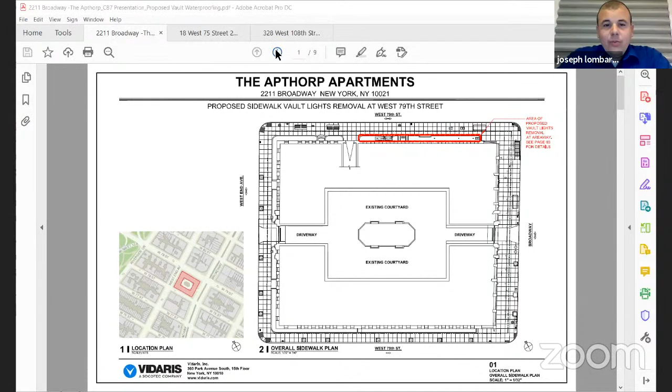And if you go to the next slide, we have some... Can I interrupt for a second? What is an EPDM? EPDM is a single ply rubberized roofing membrane that was popular 20 years ago or so, even more. But now with new technologies and roofing systems, they've gone to a modified bitumen type of membrane, which is a petroleum-based membrane with granules that protect it from UV degradation.

So it's a better water system for the area. And in conjunction with the modified bitumen membrane, we use liquid resin flashings, which is a liquid applied waterproofing at all terminations, seams, and joints. It's just a more robust waterproofing system that's going to protect the machinery and the materials down in the boiler room below.

All right, and I assume whatever happened way back whenever happened without Landmarks involvement. I can only assume because I've been working closely with Landmarks, and we've done a lot of research, and there's no photo documentation or anything that shows a time when this areaway was closed over, because on the rest of the building, all of the areaway is accessible and you could see into the lower level.

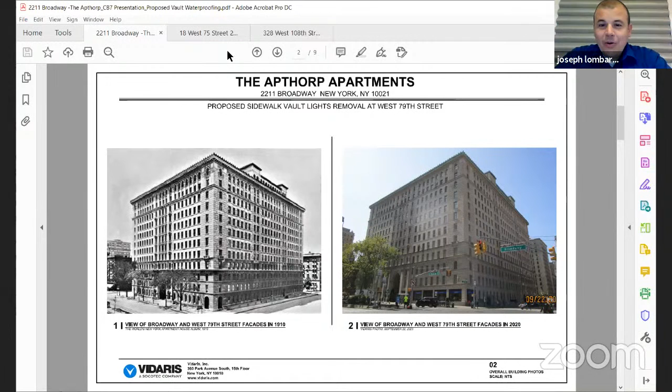So if you go to the next slide, we should have some photos of the conditions I'm talking about. So here we are, I just wanted to give you guys a reference. The first photo, you're looking on the northeast corner towards the building, so you're looking southwest towards the building, and you'll see that granite wall that I was talking about. Thank you, that's about 4 feet high.

I myself am not the tallest person around, so for me to actually see into that, I have to stand directly adjacent to it and look over to see what's going on in there. And if you look at the photo on the right, you'll see what we had to do to temporarily stop the water from coming in. You can see the black below the clear polyethylene sheet, and we've tried termination bars and whatever we could to stop the water from coming in. So that's where we currently stand with this areaway.

I have a couple of questions. In photo number 1, I'm not the tallest person in the world either, but I did glance over. Before you put that structure there over the wall, there were people living in that area. And that's why I thought that structure was put there.

No, that particular structure you're seeing in this photo was - there's a vent below that from the boiler room space. So that perforated screen around that is to allow the airflow, not to house anyone. That would be a deterrent from somebody sleeping there. That's what I meant. Correct. So, also, in photo number 2, you have a bench.

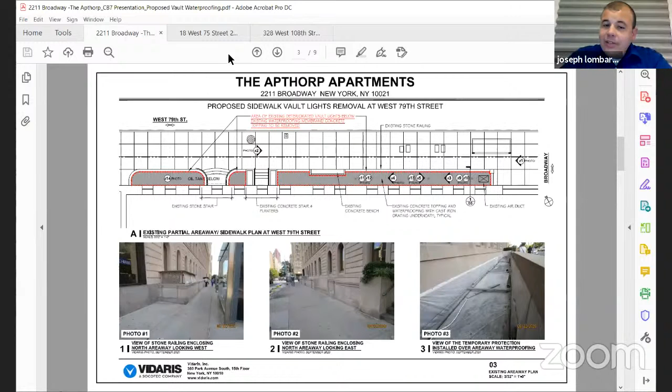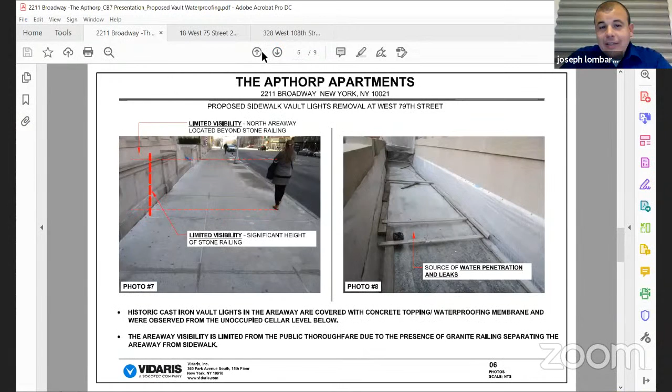If you could go to the next slide, I have a section that might help—I'd like to see the vault lights. One more photo—actually, photo number 6, if you go back. Two slides, please. There you go. Photo number 6 in the bottom right corner, that's from the boiler room looking up, and you'll see.

Do you have a photo of the actual vault lights? Yes, so this—they are. Oh, there they are, okay. This grid, you see from the bottom up. Do you have any photos of them at the sidewalk level? No, they're all covered and encapsulated by this black rubber membrane, which is in the picture adjacent to the left.

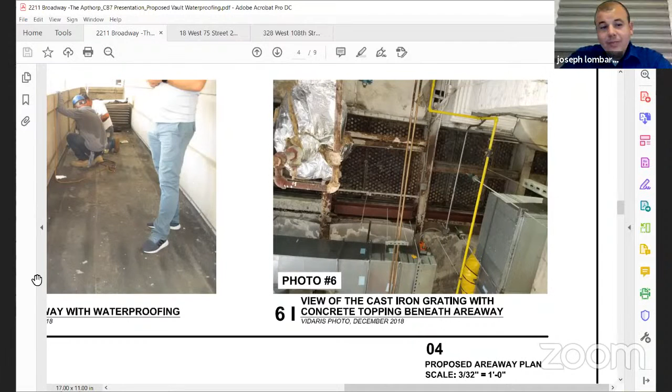And are the vault lights generally intact? No, they're not. What I'm actually showing is one of the better areas. In most areas, they've either completely rusted out—because they're cast iron—and fallen out, or they're missing all the glass and just not in very good shape, structurally or aesthetically.

Okay, thanks. Thank you. So if you could please zoom out.

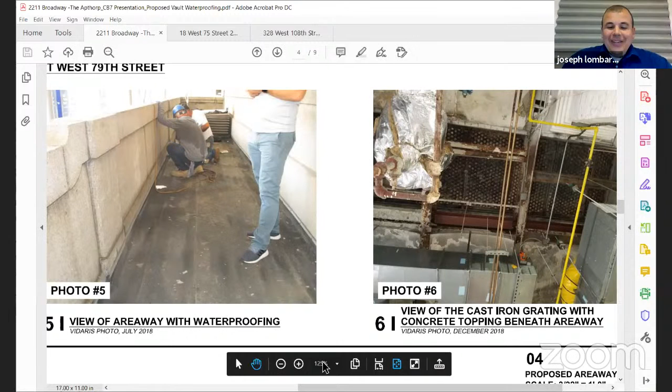In this picture on the left, you'll see the condition of the membrane prior to the clear plastic sheet we just put down temporarily to stop the water from coming in. It's just a black membrane going around the areaway. This is actually clean—we cleaned it out very well. It was becoming a garbage bin; people were just tossing their trash in there. Unfortunately, sometimes people were found sleeping in there.

So what we're hoping to do is put back a clean membrane, just to clean up the area and make it look a little better than it was. The management company running the building now really cares about it as much as I do, and they're maintaining it very well. I don't foresee that happening in the future.

I hope not. How does the drainage work from the areaways? Is there a drain in the areaway? There's one drain—it's not shown in these photos, unfortunately, but there is one drain in the areaway.

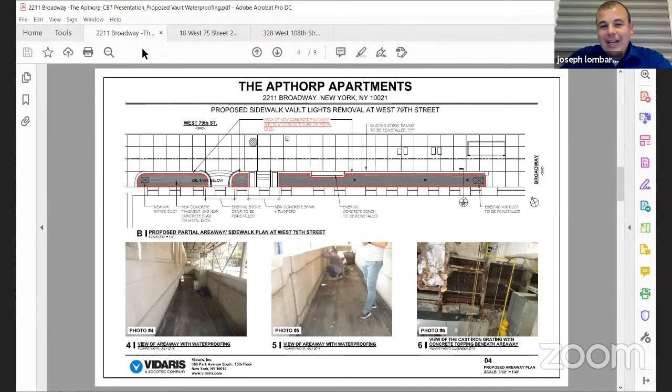Yeah, I can't, honey. Sorry. No worries, no worries.

So that's pretty much it. We've definitely taken drainage into mind with this proposal.

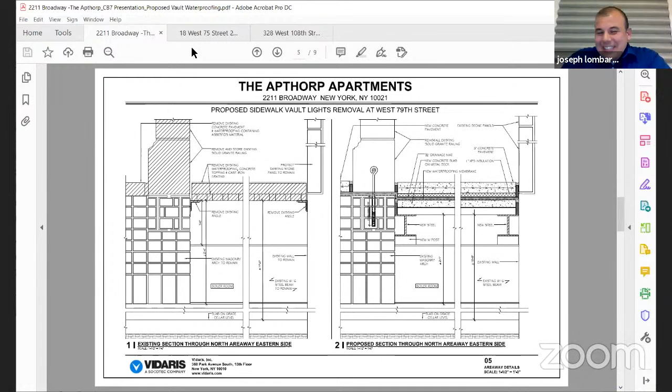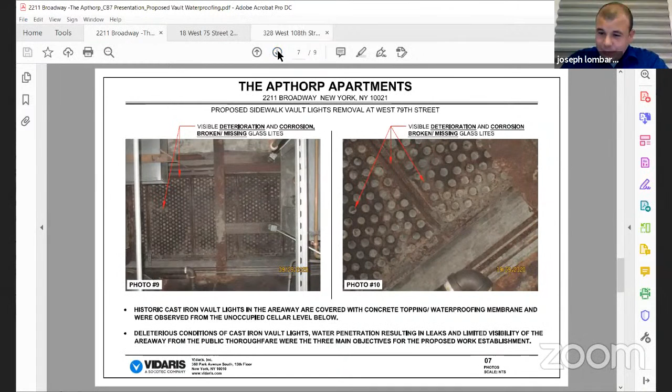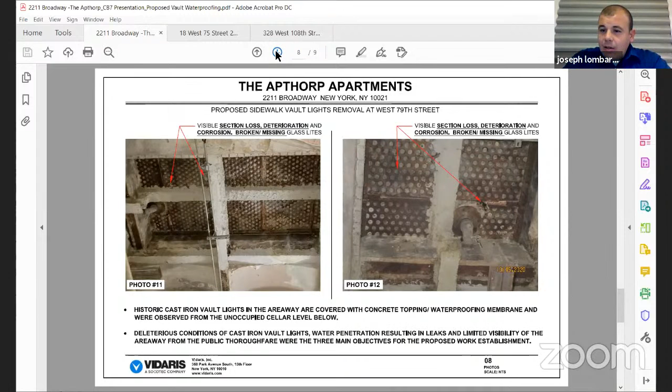So will that just be removed or covered over? I would like to remove everything down to the existing steel structure, and then we're going to put a new corrugated metal deck, lightweight topping, and waterproofing. So what's going to be permanent and visible is corrugated metal? No, it's going to be a lightweight concrete topping with waterproofing on it, and the waterproofing will be light in color. It should brighten up the space.

Is the waterproofing a separate material on top of the concrete? Yes, it's a liquid resin flashing, which you could get in white or gray.

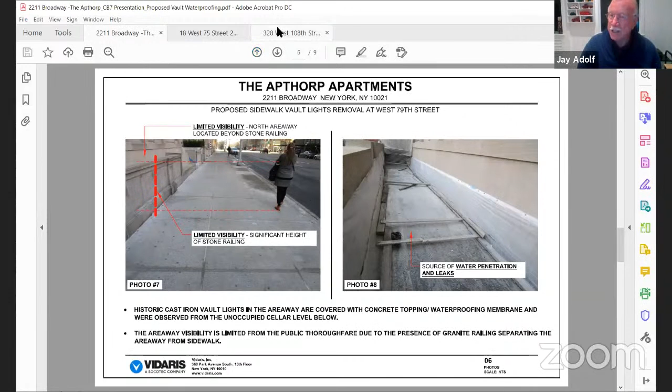Have you guys considered putting any kind of elevated grading or something that would solve the problem of people sleeping in there? Because it sounds like once it's all done, you have the same issue.

You know what, you're right. But one thing that's a little different now from when I first started with this project six years ago, it was a different management company. I don't want to say anything about that, but the new management company is very much on top of the security, lighting, and overall maintenance of the building. I do hope, from what I've seen, that they've been able to reduce drastically the amount of homeless that have been in the north corner.

As far as grading on top of that, I'm willing to do anything, but I know Landmarks will not be too excited about putting a grading on top of that. And the building itself, as much as I love the building, the people who live there love this building just as much, if not more, a lot of them. So I don't know if they would like us to modify anything like that, but I have thought about something like that.

Just as an aside, were you there when the rooftop addition was proposed? I was not there when it was proposed, but I know all about it. I have some associates who did try to get that, and I'm glad they didn't, because right now, in addition to the cornice work that I did, there are two colonnaded masses up at the top of the building.

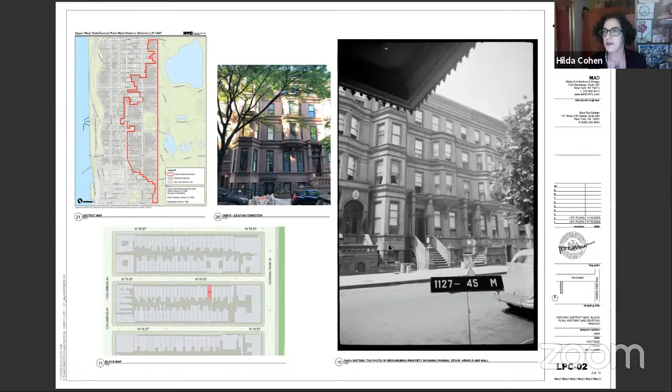No problem. I'm sorry to interrupt. Yours is the straight stoop. Straight stoop, correct, in that historic photo, and we'll see it again. So we use it a couple of times in the presentation.

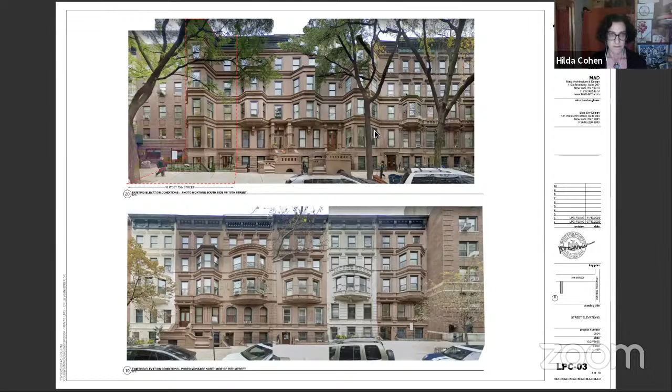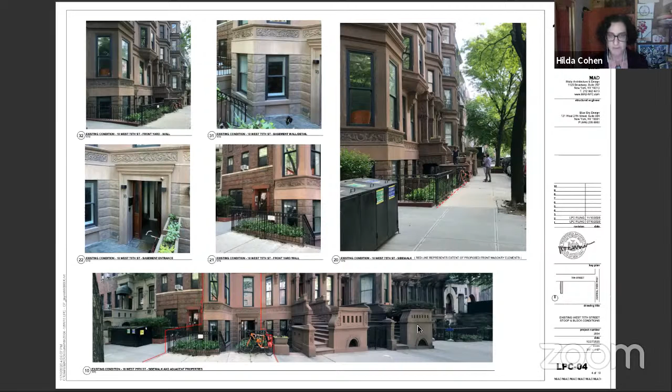It's across the facades, across the bay. We've got the enlarged stone. We will be replicating all of these details along there. And then the bottom is a photo montage so that you see the basement entrance. You also see these really substantial masonry stoops of 20 and 22. Both of those have been recreated in the past 10, 15 years. So again, this is a larger scale of the survey.

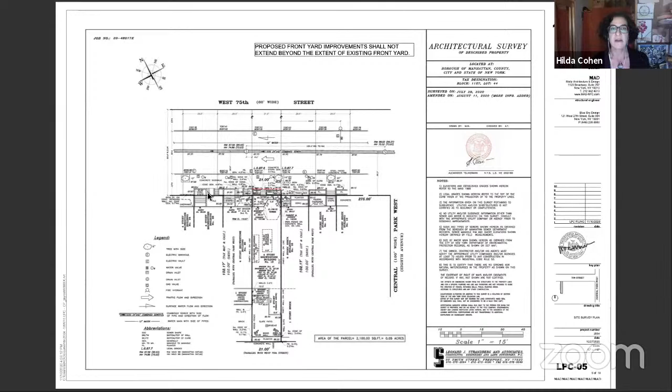In order to do a real examination of how far out it sits with our neighbors, we asked our surveyor to take 5 different building properties. And here, up left photo, you can see this red line. This is a blow up of it, and this red line is the extent of where the curb sits now, and we are not pushing past that. We've been speaking back and forth with DOT.

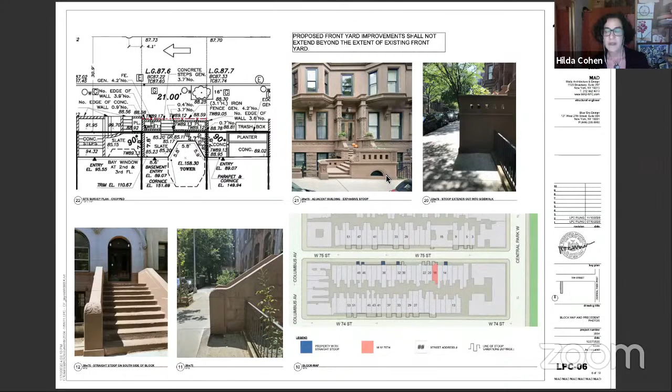They said that this was a really good line to hold on to, so that's also what we're working with. However, we do show that this block has undulating stoops. The stoops push out. This is a diagram of sort of what happens on the block. And again, a photo of our adjacent neighbor, 20 West 75th Street.

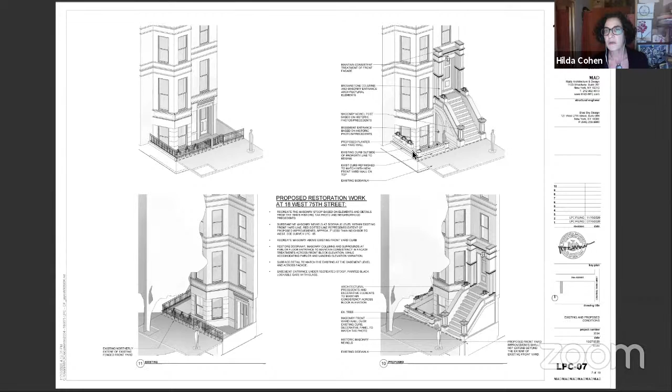So here's the proposal in more or less one photo or one example. We are putting back doors instead of where the window is at the parlor floor. We're replicating the larger scale of the brownstone columns, which is directly adjacent at 20 West 75th. We're replicating the masonry stoops, the substantial masonry newels. We've got the masonry wall coming around. We have a lot of height differences that we're working with, so we're using planters, which are also visible at the 20 West 75th Street.

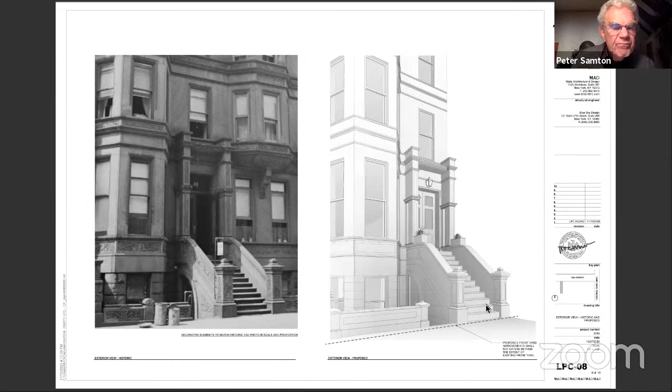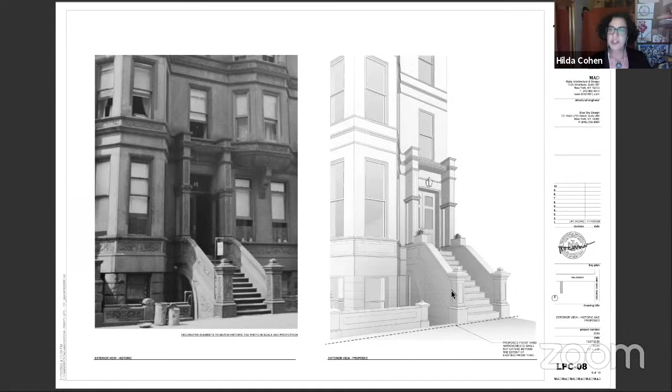Here is a rendering that we've taken to look in the same perspective as the historic, so that you can see we're maintaining these historic lines, we're maintaining the substantial size of the newels. And this is where we say that we've got about 3 risers that we have to add into our stoop to meet the height change, with that 23-inch height change that the previous owner did before. The rest of the lines are very consistent, and the substantial heaviness of this masonry stoop, just like our neighbors, it doesn't feel overwhelming to have those extra risers.

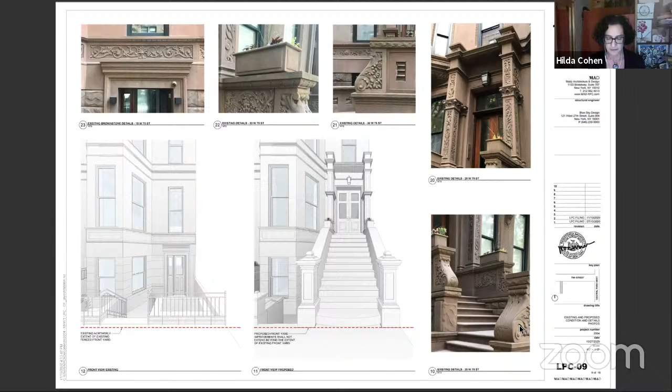Here's a few more images of the renderings. Again, this is the red line, which is our current extent of the front yard. We have the planters, which you can see are visible, some of the decorative elements that we would be matching, a lot of the detail, a lot of the colors that we would be matching. And here's some more details.

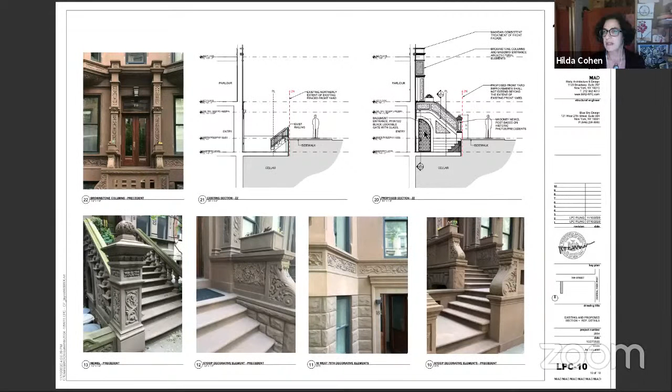The sections show what is existing, which is just a simple rail down to the basement entrance. And then we would be putting back the masonry stoop. You would still have an entrance. We would have a metal gate at the basement entrance. Everything is replicated based on that historic photo, with the exception of the change in height, that 23-inch change in height, which is what brings us here.

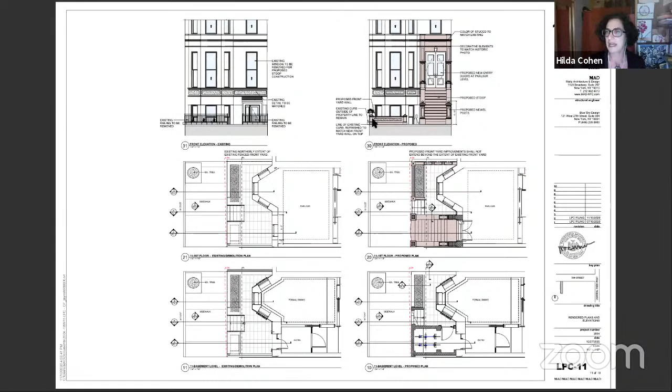And I can have you look at this if you want. And then if you want to come back to any of these, we can.

As we're talking about the doors, we still are looking to have 2 double doors, which is in keeping with the types of doors that we have at the stoop.

Because of that change in height, we are lining up with the decorative elements within the door rather than having a transom above. But the light is similar. We're using all of the same language, all of the same details, and all of the same horizontal lines.

May I ask a question? I'm just having a hard time following the 23-inch increase, which is the heart of the matter. That I can see the 23-inch increase in height on the steps. Is it also reflected at the top of the new proposed door? So would that new proposed door be 23 inches taller? This picture is where I'm having a hard time.

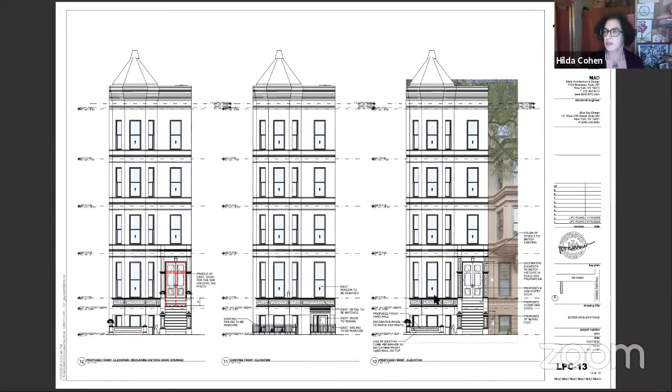It is high, yes. And that means that the floor of the parlor is at the bottom of the window, whereas in a typical condition, if the previous owner had not done that renovation, it would come up to about your knee when you're on that parlor floor. Does that better explain it? It does, thank you.

Is this a single family residence? It is a single family residence. Thanks.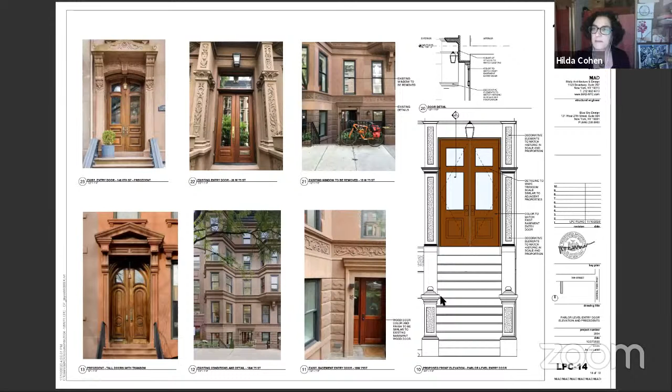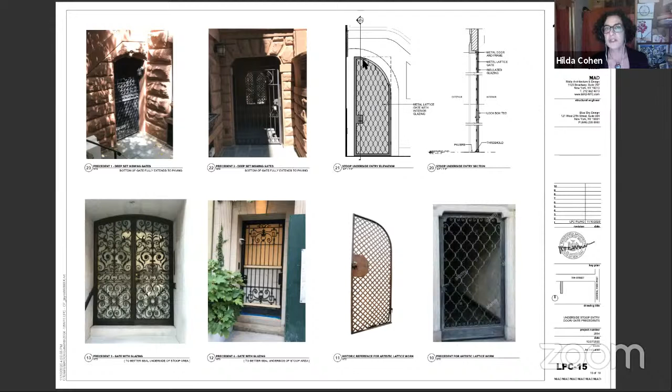There's only a couple more photos with what we're doing at the gate. The precedent was a historic lattice and then more of a modern take on the lattice work. We have some precedents because we are putting some glazing behind the gate. Here's the photo where we have the curved element, which is the historic masonry opening with the gate.

Here's a little bit more about the front areaway where we're taking out the black iron rail and we're putting in the masonry wall. We're using planters once again, and I will go back to another photo at the end so that you can see all of these elements put together.

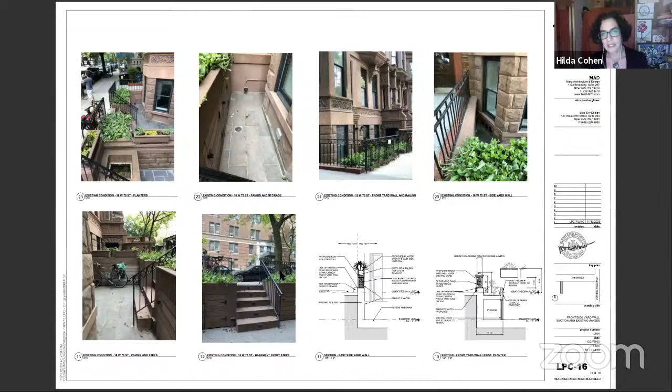But we're maintaining sort of this separation between the outside and the inside, but instead of the black rail, it is the masonry. Here are a few of the details.

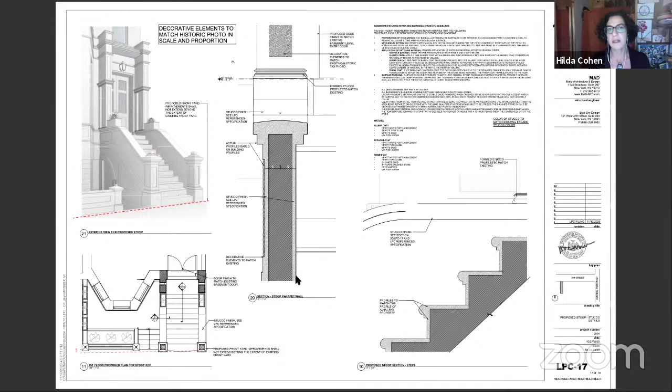The renovation that was performed previously is in keeping with all of the original detail, but it is all at the stucco. There's no cast stone, there's no real stone left at the surface. So our finish would be matching that, our profiles would match that. Any substrate would be covered with the stucco. That stucco would match in color and it would match in details, decorative elements across the face. And here again is the comparison with the historic tax photo and then the proposal.

Great. Other questions? I have a question. Oh, go ahead. Oh, wait, go ahead, Doug.

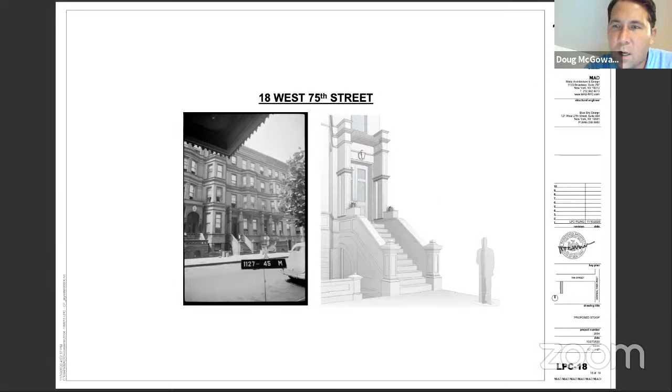Are we, on this particular request, going to be discussing specifically the appropriateness of the 23-inch increase? Is that the heart of the issue? Ms. Cohen, in your brief, you mentioned specifically that that was why you were here at the Preservation Committee, that specific reason?

So in our conversations with Landmarks, they consider that 23-inch to be an existing condition. It is something that we have to accommodate, but it's an existing condition. And since it does not match 100% the historic precedent, we have to go through the process of going to the commission. Our feedback, and I don't want to bias you one way, is that they seem to be completely supportive of this. They think the commission is going to be supportive of this, but the process, because of that 23-inch height, changes the level of the landing. So the process is to go through with the community board approval and Landmarks Commission.

If I may add, this is Juan Matiz. So this existing condition, basically the prior owner raised the parlor level so that the floors are coplanar with the sill of the windows, which are landmark accurate and historically accurate on the exterior. But our doorway happens to be these 23 inches higher, and therefore that difference does not allow our owner and us to provide you with an exact and historically accurate condition, and therefore that oddity is what we're dealing with.

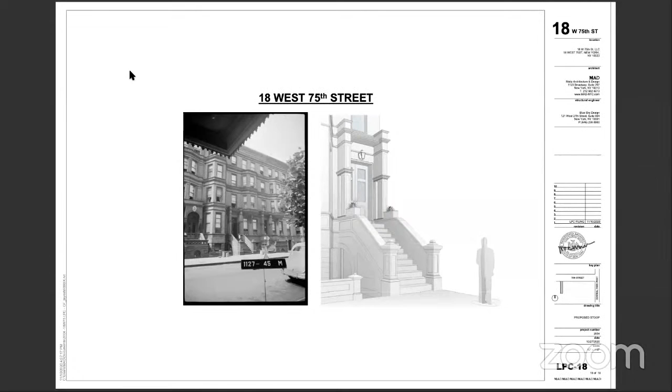Susan, did you have a question? Thanks, I did.

I'm just curious why you're going from a railing to the masonry at the front yard wall. It was the condition of the historic nature of it. He's also next to a multifamily building, and he prefers to have the masonry. I think he's had people lock up their bikes in front and find it quite disturbing, so he's very taken with the masonry.

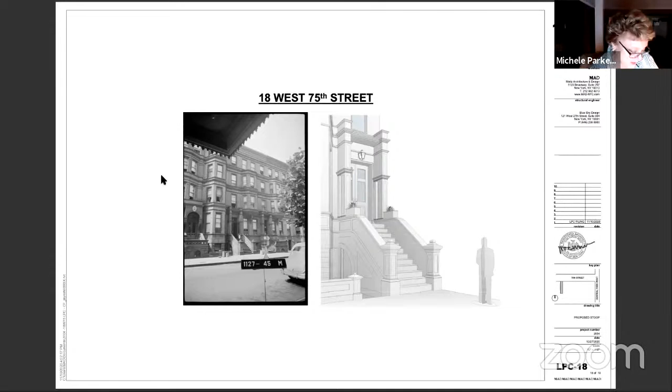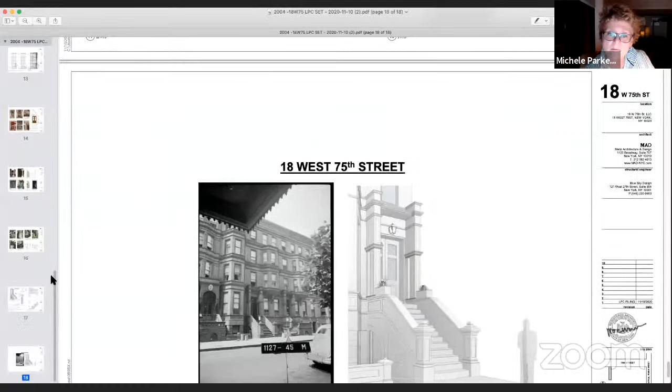Okay, thank you. I have another question about the masonry on the west side. Can you go back to that picture that shows the metal railing, one of the existing conditions photos, so we could see the railing on the west side? Let me see. Well, this is okay.

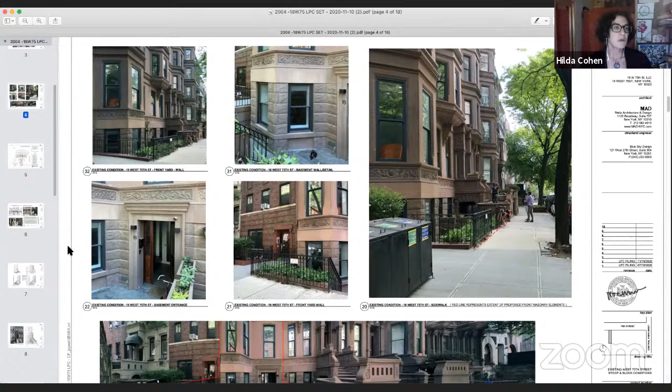Having masonry there will block some of the light from going into the window, won't it? He's aware of that, the owner is aware of that. What we've done is we've not raised it as high as we absolutely have to. For code, we've raised a certain height, and we've put planters there, which is actually what we have. This is our east side where the planters are, and on our west side there are planters too. So he's aware it's going to block a little bit of light. He's accepting of that.

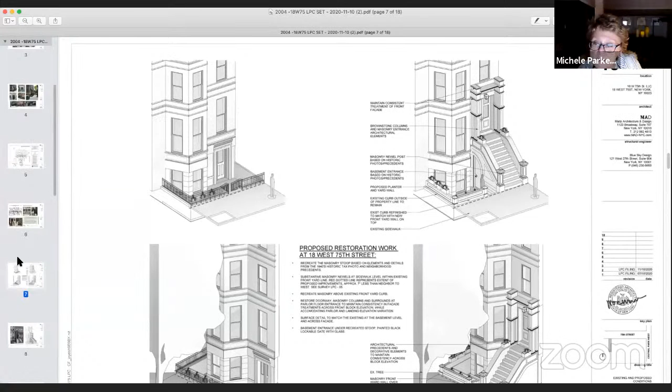Could you go back to what you're going to do with the doors and the window to the basement entrance? That will remain an entrance, correct? The basement entrance will remain an entrance, it will be underneath the stoop. We don't have specifically a drawing of that with the new masonry, but we don't anticipate having to change that door. We will have to change the masonry around it because the new stoop will sort of take its place, but there won't really be a change in height to that door. We were going to keep the door as is.

Do you have room to get in there under the stoop? It looks very tight. It's actually, after they raised that floor 23 inches above, quite a tall space. But I think that's an 8-foot door we're talking about.

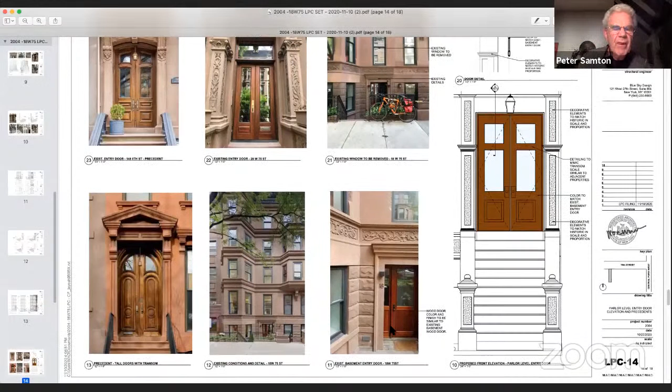Right, we have steps down. I can go to one of the sections so you can see it actually is quite high, the space underneath the stoop. Oh, because you have the 3 additional risers. Yes, with the raise of the parlor floor level, we have a taller basement. The existing condition is that the basement floor is taller than typical.

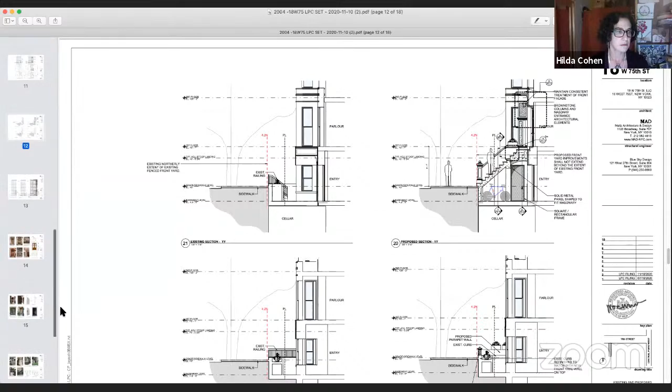Can you explain why you have the door in 4 panels, or 2x2 panels of glass, instead of 1 tall panel of glass on each side? For the front door, yeah, it was a selection. I don't know if that ratio has been discussed.

I'm just looking at your precedents, and the one that seems most applicable is the tall, thin single panes on either of the French doors. The divided light ones are very decorative, sort of curved and carved. It seems like you're proposing a much simpler door, and the simpler doors seem to be the ones that have the single pane on either side. So what precedent can you cite for that particular configuration, or why is it that way? The client said he liked his basement door, so we were mimicking some of the heights and cleanliness, the more modern lines of the basement door, which is almost split, where it's wood to about halfway through. If you can see on this photo, here's the existing door, so it is a higher wood, not as low as what we have at our neighbor.

I understand, I just got to tell you that a basement door and a front door on top of a stoop strike me as different things. They're very different, yeah. What was the configuration of the historic door? I can go to the best photo that we have for that.

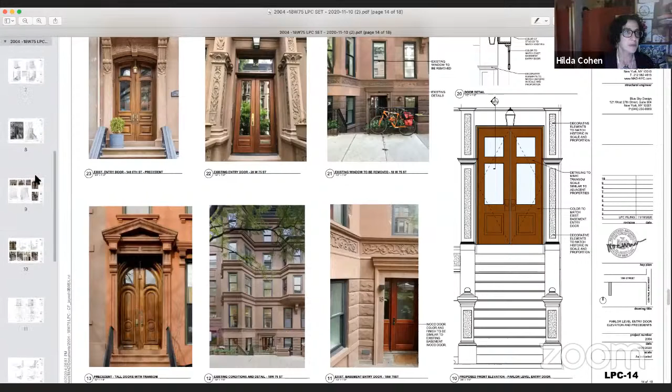It was a taller glass than what we are showing in the proposed design. Wouldn't you want it to be the same or similar? We certainly can, I don't know if that becomes one of those issues.

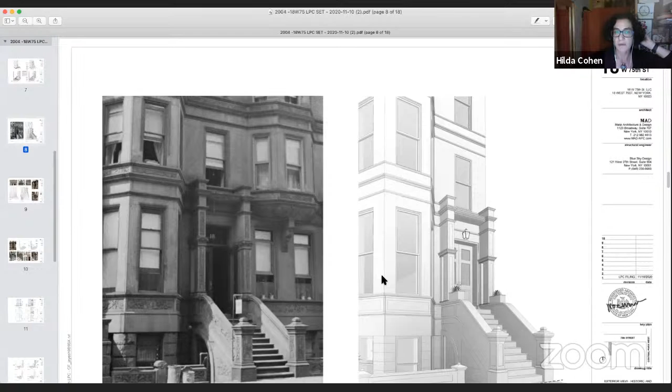I can certainly propose that to the owner. There's not an absolute set, it's much more at this point. LPC has told us that it's really about the masonry stoop, but I definitely will make note of that. I think it's a very good point.

This is Juan Matiz. Additionally, the doors, from having been part of many of these kinds of restorations, have a very lax leeway on the type of panel, the amount of glass, even the color. We find there's usually not a very specific type of door that goes with a specific type of building, and you all are familiar with the neighborhood more than us. There's quite a variety, as long as they're properly material, properly proportioned, with the elegant kind of hardware that's appropriate.

Landmarks is fairly lenient with the actual geometry, unless you do something completely out of context. But if you're replicating the stoop and you know the configuration of the historic doors, why not replicate those also? Well, they can't, because they have a much shorter door and don't have a transom. They can do it proportionately though, the basic configuration of the single pane glass rather than divided lights could be done.

Is that correct? Yes, we will discuss it with our owner, but I just wanted to make you all aware, from our vantage point, there is some leeway with the doors. We'll speak to the owner and see if we can increase the size of the glass. Now, this is just in the basement. Jay, could you tell me the terminology on this?

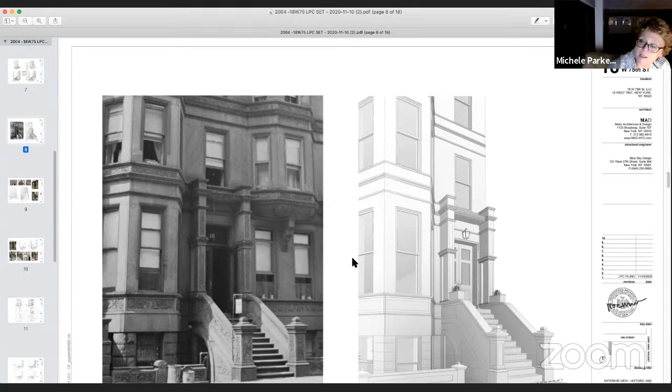Michele, they're at the top of the steps, the front door, the main door we're talking about. I know it's premature since we don't have a resolution yet, but my assumption is that we will resolve to approve the application to restore the stoop, and I would include a strong recommendation to replicate the historic configuration of the doors.

In proportion to the height increase of the steps. And that's just the front door. The front door should be one pane, not two, right? Yes, it should be, well, two each single panes, one on each side. I could go along with that.

The proposal doesn't bother me. For one thing, it kind of mimics the detailing on either side of the door, and it also suggests to me a little bit reminiscent of the transom, but I could go either way on it.

I wouldn't suggest making it a condition of approval, but with a strong recommendation stating that would be a preference. Great, we could do that. And that's my, one man's opinion.

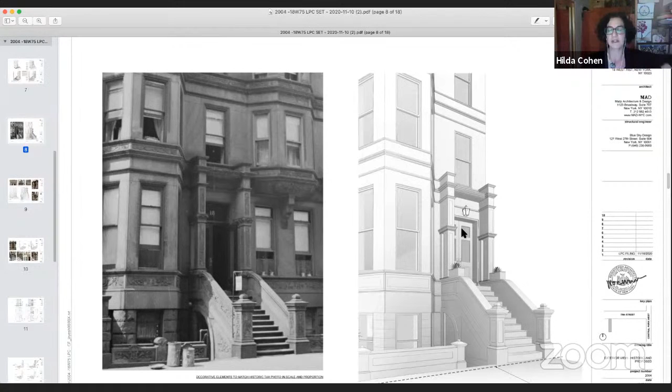Is anybody going to do any detail work on the staircase, like the original detail? Yes, in the computer rendering, the areas that have panels represent the decorative elements that would be matched. So where we have a decorative element here, we've created this rectangle of decorative element instead of rendering it fully in the computer. It won't be blank, but it's a very heavy image, and the same with the newel.

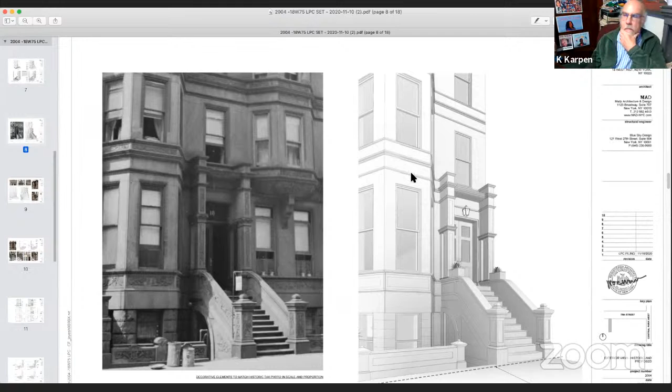Great, all right. Any other questions, or are we ready to move forward with a resolution? Yep, I think so. Okie dokie. Would you please stop sharing your screen so that our colleagues can see each other? Thank you, okay.

All right Michelle, you've been working away, do we have a resolution that includes the recommendation to replace the front door as one pane of glass, one on each side? Right, that would be our strong recommendation. A recommendation. And other than that, it's an approval resolution. Madge, did you want to say anything? Nope, just vote.

Okay, I'll call names. Jay, yes. Josh, yes, thank you. Susan, yep. Peter, yes. Madge.

You already called her twice, Madge? Did I call Susan yet? Yep. Okay, Doug, how about... I had a call in the middle, I'm sorry.

So your vote is what, Madge? Yes. Kay? Yes. And I'm a yes. So it's 1, 2, 3, 4, 5, 6, 7, 8, 0, 0, 0.

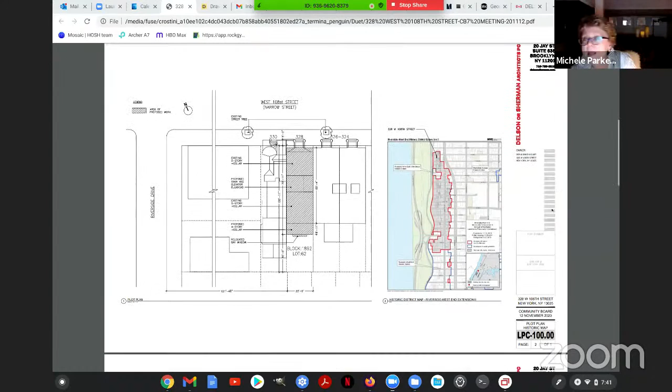I went up to, I live on 80th, I went up to 108th Street and stared at that building and the one next to it for a long time, and looked at the before and after pictures of the building at 328. And the first thing I thought was it's going to take some maintenance to keep things like plants from growing on it, vines. And I wondered what effect, if any, the buildings to each side would have on the paint that was used. Maybe there's none, but...

The building to the left of ours, as shown in the before and after photos, is going through a very large renovation. It's actually 2 or maybe 3 row houses being combined into one very large project. It's currently a painted facade and presumably will continue to be. The building to the right is a brownstone that is not painted.

In terms of vines growing up the building, there didn't used to be vines, and there are no plans to grow new vines. This shows what it looks like in its current configuration. There's a tree planted in the front yard, but no vines planted. I don't imagine vines would grow any differently on an elastomeric coating than on a painted brick facade.

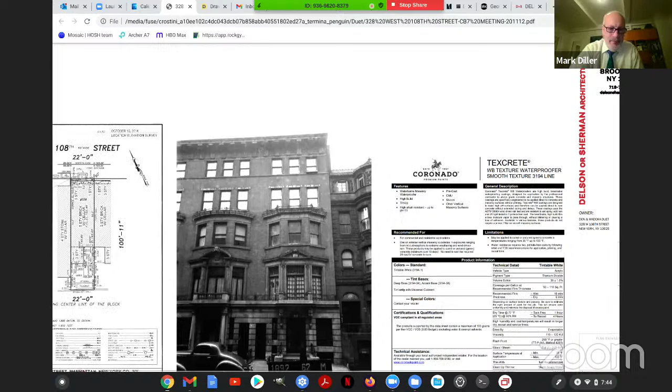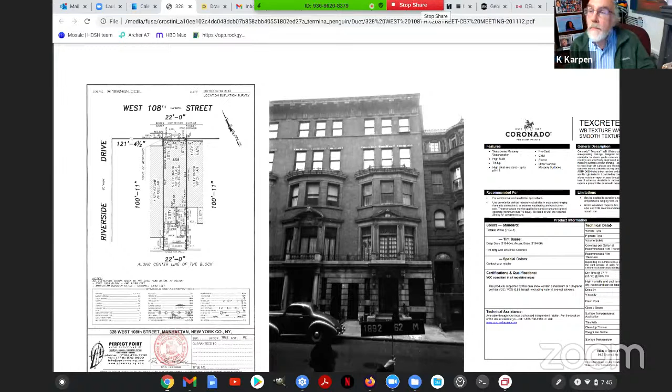All right, other questions? I'll stop sharing. There we go. You think we're ready to vote, or what's our feeling? Susan, where's Sue? I don't see her. Susan's here. Susan, you have a question, or you want to say something? Wondering what we're having for dinner, but no, nothing really.

The question is the appropriateness of the type of paint—is that correct? Correct. If I could share, I'm generally not in favor of painting brick for any purpose, using anything, but it looks like the issue here is not whether or not it should be painted, but with what. I certainly lack the wisdom to guide that conversation.

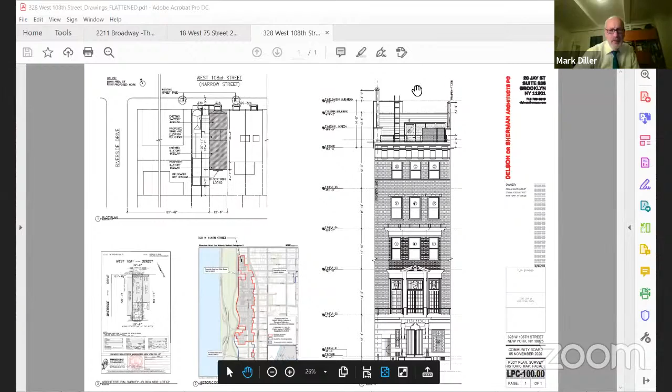Did we see the picture of what it looked like with the paint? Can you show that? Did you see that picture, Mark? The one photograph I had didn't show it. The one corner, the left-hand side. No, the only thing I have is a drawing—this is all I have. Oh, I apologize, my Wi-Fi cut out, could you ask the question again? I wanted to see that close-up picture again of the paint job—everyone's frozen for me. Oh, I'll share the photo again. Am I the only one frozen? Thank you for indulging me, team. Oh, please, not at all. Yeah Doug, I think you are. Okay.

No, it's a satin finish. Okay, so the resolution would be to approve the elastomeric coating.

Oh, when was this painted? I forgot. It was painted about 3 months ago. No, it would have been a little bit longer than that. Sorry, yeah, maybe 5 months ago.

Did anybody already ask the obvious question why this raw material was used? We gave a performance spec. It was to be a breathable paint for exterior masonry, and the contractor chose this mistakenly because it was actually sold to him as a paint, and it is breathable, and it is exterior, and it is for masonry. But frankly, our main concern was about the color of it. We never even checked to see if he was using an actual paint.